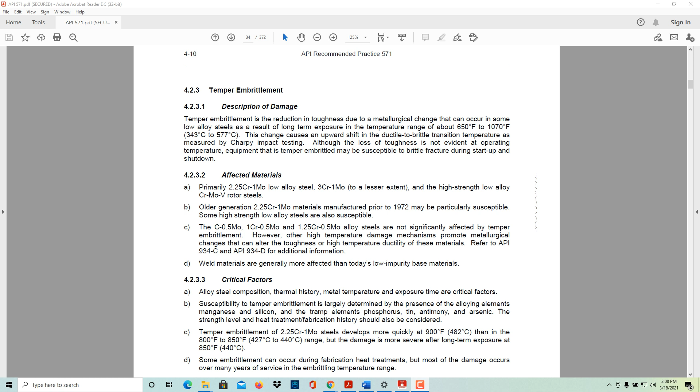Although the loss of toughness is not evident at operating temperatures, equipment that is temper embrittled may be susceptible to brittle fracture during startup and shutdown. Affected materials: primarily 2.25 Cr-1Mo low alloy steel, 3Cr-1Mo to a lesser extent, and the high strength low alloy Cr-Mo-V rotor steels. Older generation 2.25Cr-1Mo materials manufactured prior to 1972 may be particularly susceptible. Some high-strength low alloy steels are also susceptible.

The 1.25Cr-0.5Mo, 1Cr-0.5Mo, carbon-0.5Mo, and 1.25Cr-0.5Mo alloy steels are not significantly affected by temper embrittlement. However, other high temperature damage mechanisms promote metallurgical changes that can alter the toughness or high temperature ductility of these materials. Refer to API 934C and 934D for additional information. Weld materials are generally more affected than today's low impurity base metals.

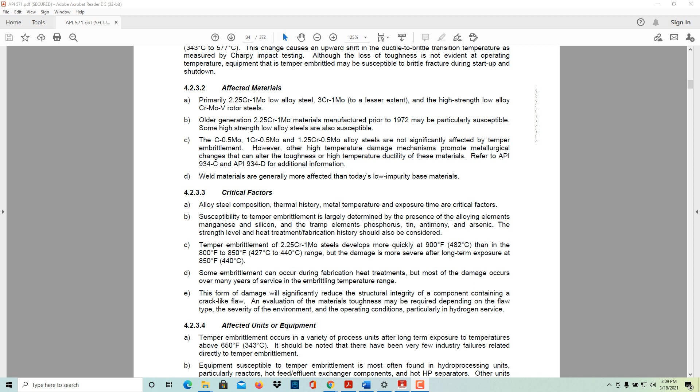Critical factors: alloy steel composition, thermal history, metal temperature, and exposure time are critical factors. Susceptibility to temper embrittlement is largely determined by the presence of the alloying elements manganese and silicon, and the tramp elements phosphorus, tin, antimony, and arsenic. The strength levels and heat treatment fabrication history should also be considered.

Temper embrittlement of 2.25Cr-1Mo steels develops more quickly at 900°F than in the 800 to 850°F range, but the damage is more severe after long-term exposure at 850°F. Some embrittlement can occur during fabrication heat treatments, but most of the damage occurs over many years of service in the embrittlement temperature range. This form of damage will significantly reduce the structural integrity of a component containing a crack-like flaw. An evaluation of the material's toughness may be required depending on the flaw type, the severity of the environment, and the operating conditions, particularly in hydrogen service.

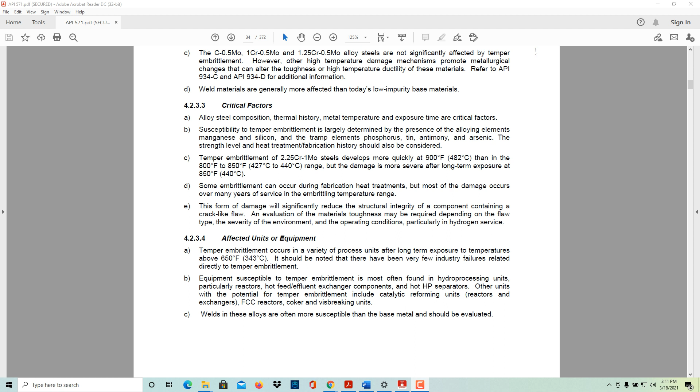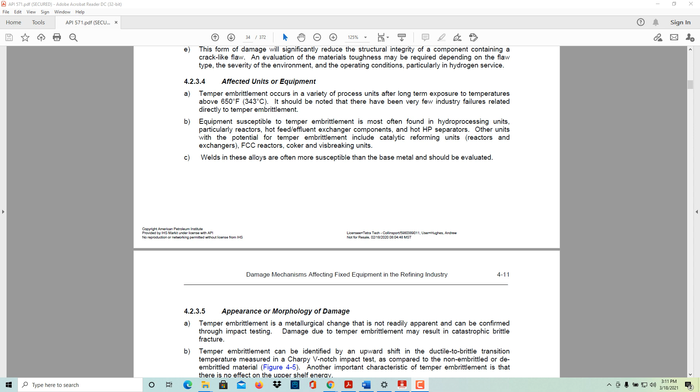Affected units or equipment. Temper embrittlement occurs in a variety of process units after long-term exposure to temperatures above 650°F. It should be noted that there have been very few industry failures related directly to temper embrittlement. Equipment susceptible to temper embrittlement is often found in hydroprocessing units, particularly reactors, hot feed effluent exchanger components, and hot HP separators. Other units with the potential for temper embrittlement include catalytic reforming units, reactors and exchangers, FCC reactors, coker, and visbreaking units. Welds in these alloys are often more susceptible than base metal and should be evaluated.

Morphology of damage and appearance. Temper embrittlement is a metallurgical change that is not readily apparent and can be confirmed through impact testing. Damage due to temper embrittlement can result in catastrophic brittle fracture. Temper embrittlement can be identified by the upward shift in the ductile to brittle transition temperature measured by the Charpy V-notch impact test as compared to the non-embrittled or de-embrittled materials. See Figure 4-5. Another important characteristic of temper embrittlement is that there is no effect on the upper shelf energy. SEM fractographs of severely temper embrittled materials show primarily intergranular cracking due to impurity segregation at grain boundaries.

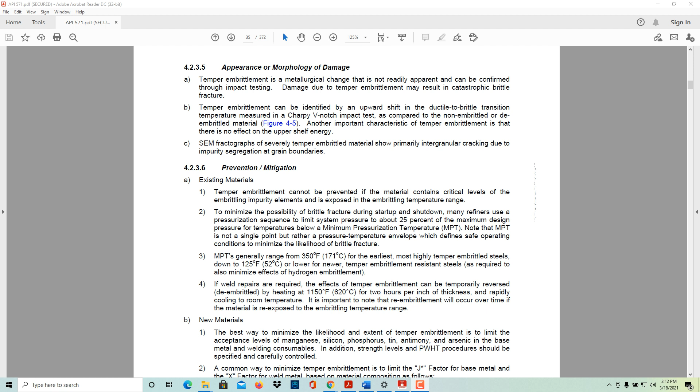Prevention and mitigation. Existing materials. Temper embrittlement cannot be prevented if the material contains critical levels of the embrittling impurity elements and is exposed to the embrittling temperature range. To minimize the possibility of brittle fracture during startup and shutdown, many refiners use a pressurization sequence to limit system pressure to about 25% of maximum design pressure for temperatures below a minimum pressurization temperature. Note that the MPT is not a single point, but rather a pressure-temperature envelope which defines safe operating conditions to minimize the likelihood of brittle fracture. MPTs generally range from 350°F for the earliest, most highly temper embrittled steels down to 125°F for newer temper embrittlement resistant steels, as required to also minimize effects of hydrogen embrittlement.

If weld repairs are required, the effects of temper embrittlement can temporarily be reversed, de-embrittled, by heating at 1150°F for 2 hours per inch of thickness and rapidly cooling to room temperature. It is important to note that re-embrittlement will occur over time if the material is re-exposed to the embrittling temperature range. New materials. The best way to minimize the likelihood and extent of temper embrittlement is to limit the acceptance levels of manganese, silicon, phosphorus, tin, antimony, and arsenic in the base metal and welding consumables.

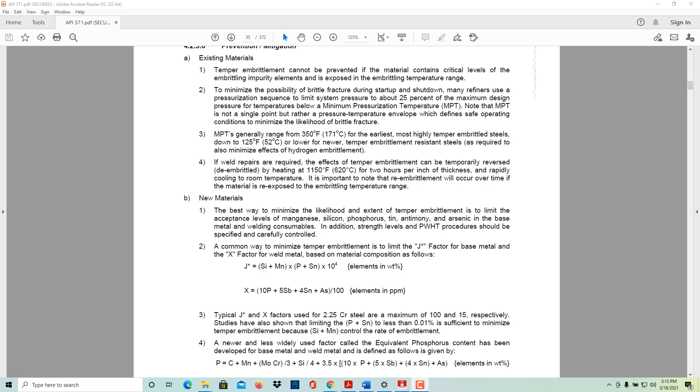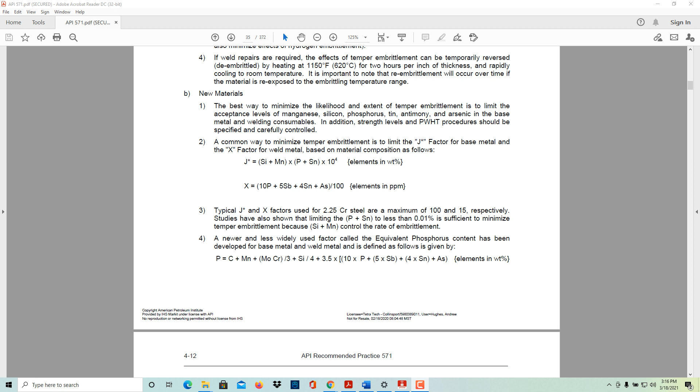A newer and less widely used factor called the equivalent phosphorus content has been developed for base metals and weld metals and is defined as follows: phosphorus equivalent equals carbon plus manganese plus the product of moly, chrome divided by 3, plus silicon divided by 4, plus 3.5 times (10 times phosphorus plus 5 times Sb plus 4 times Sn plus As), elements in weight percent.

So expert metallurgical advice should be solicited to determine acceptable compositions, toughness, and strength levels, as well as appropriate welding, fabrication, and heat treatment procedures for new alloy, low alloy, heavy wall equipment, and low alloy equipment operating in the temper embrittlement or creep range.

Inspection and monitoring. A common method of monitoring is to store blocks of original heats of the alloy steel material inside the reactor. Samples are periodically removed from these blocks for impact testing to establish the ductile brittle transition temperature. The test block should be strategically located near the top and bottom of the reactor to make sure that the test material is exposed to both inlet and outlet conditions. Process conditions should be monitored to ensure that a proper pressurization sequence is followed to help prevent brittle fracture due to temper embrittlement.

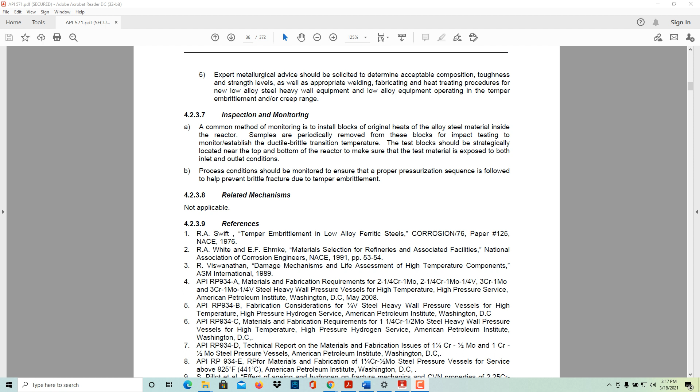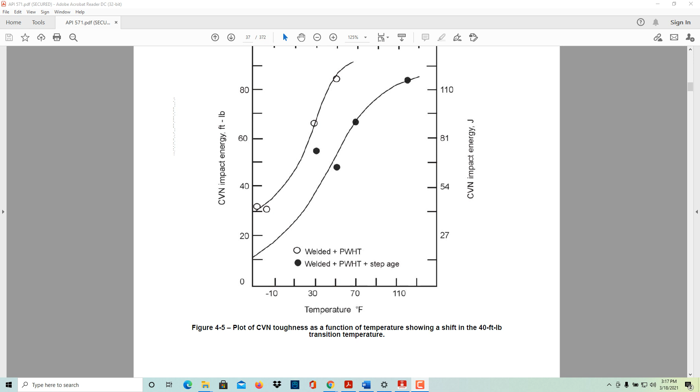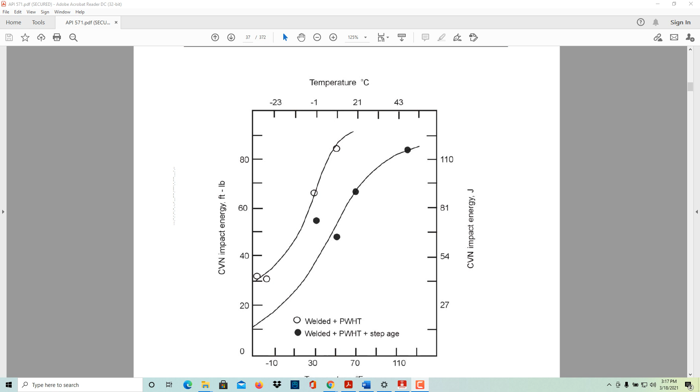Plot of CVN toughness as a function of temperature, showing a shift in the 40 foot-pound transition temperature. Temperature on this top axis, CVN impact energy in foot-pounds on this axis. Welded plus post-weld heat treatment. Welded plus post-weld heat treatment plus step age. And then CVN impact energy on this axis.

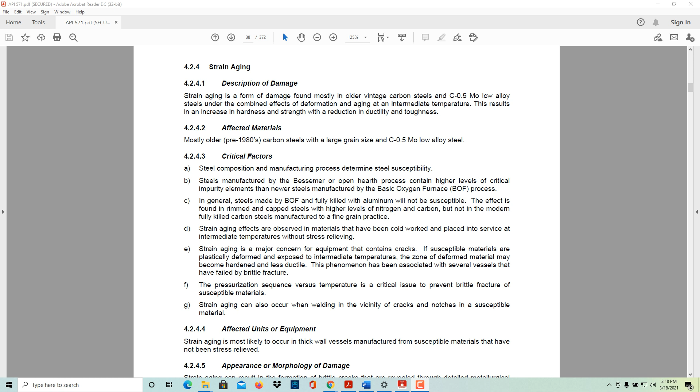4.2.4, strain aging. Strain aging is a form of damage mostly found in older vintage carbon steels and carbon half-moly steels, low alloy steels, under the combined effects of deformation and aging at an intermediate temperature. This results in an increase in hardness and strength with reduction in ductility and toughness. Affected materials: mostly older pre-1980 carbon steels with a large grain size and carbon half-moly low alloy steels.

Critical factors. Steel composition and manufacturing process determines steel susceptibility. Steel manufactured by the Bessemer or open hearth process contain higher levels of critical impurity elements than newer steel manufactured by the basic oxygen furnace process. In general, steels made by BOF and fully killed with aluminum are not susceptible. This effect is found in rimmed and capped steels with higher levels of nitrogen and carbon, but not in the modern fully killed carbon steels manufactured to a fine grain practice.

Strain aging effects are observed in materials that have been cold worked and placed into service at intermediate temperatures without stress relieving. Strain aging is a major concern for equipment that contains cracks. If susceptible materials are plastically deformed and exposed to intermediate temperatures, the zones of deformed materials may become hardened and less ductile. The phenomenon has been associated with several vessels that have failed by brittle fracture. The pressurization sequence versus temperature is a critical issue to prevent brittle fracture of susceptible materials. Strain aging can also occur when welding in the vicinity of cracks and notches in a susceptible material.

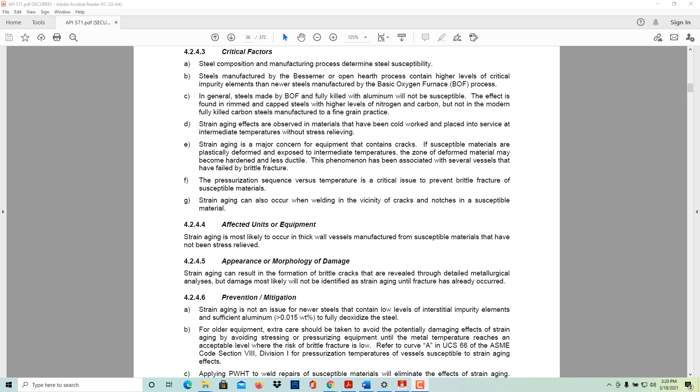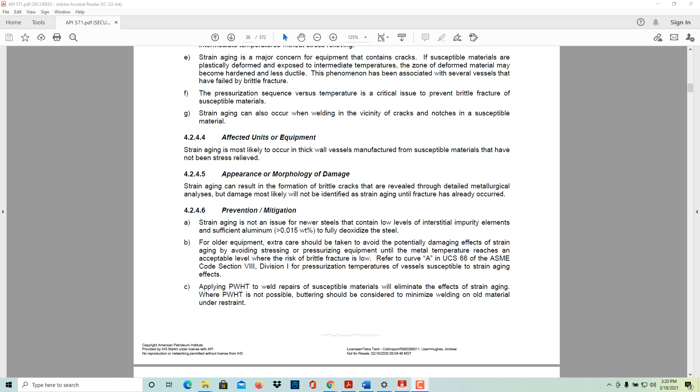Strain aging is most likely to occur in thick wall vessels manufactured from susceptible materials that have not been stress relieved. Appearance and morphology of damage. Strain aging can result in the formation of brittle cracks that are revealed through detailed metallurgical analysis, but damage most likely will not be identified as strain aging until fracture has already occurred.

Prevention and mitigation. Strain aging is not an issue for newer steels that contain low levels of interstitial impurity elements and sufficient aluminum, 0.015% by weight or greater, to fully deoxidize the steel.

For older equipment, extra care should be taken to avoid the potentially damaging effects of strain aging by avoiding stressing or pressurizing equipment until the temperature reaches an acceptable level where the risk of brittle fracture is low. Refer to curve A in UCS-66 of the ASME Code Section VIII, Division 1 for pressurization temperatures of vessels susceptible to strain aging effects.

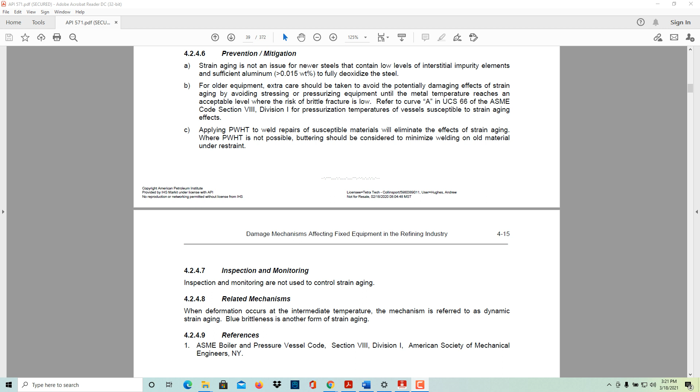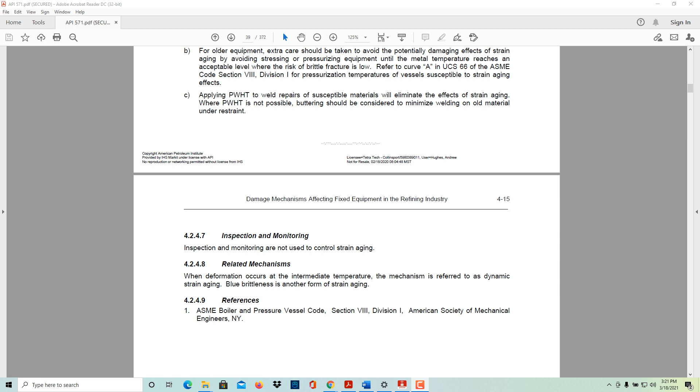Applying post-weld heat treatment to weld repairs of susceptible material will eliminate the effects of strain aging. Where post-weld heat treatment is not possible, buttering should be considered to minimize welding on old material under restraint. Inspection and monitoring: inspection and monitoring are not used to control strain aging. Related mechanisms: when straining occurs at an intermediate temperature, the mechanism is referred to as dynamic strain aging. Blue brittleness is another form of strain aging.

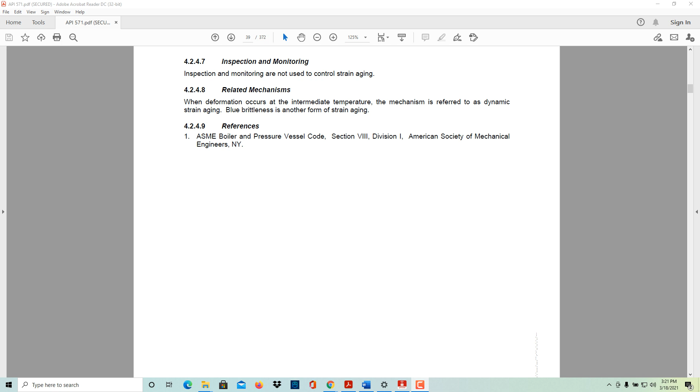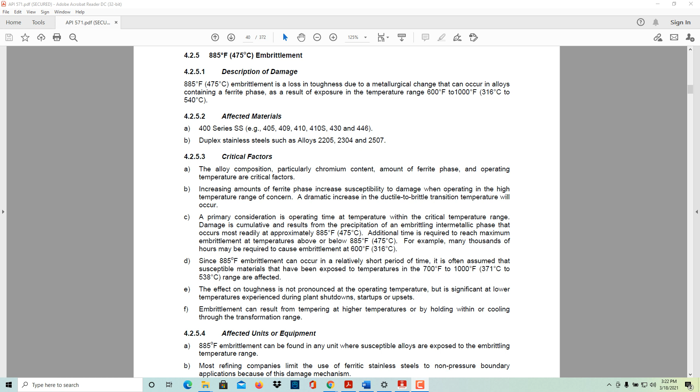885 embrittlement. Description: damage. 885 embrittlement is a loss of toughness due to the metallurgical changes that occur in alloys containing a ferrite phase as a result of exposure to temperatures in the range of 600 to 1000°F. 400 series SS: 405, 409, 410, 410S, 430, and 446 are affected materials. Duplex stainless steels such as alloys 2205, 2304, and 2507 are also affected. Critical factors: the alloy composition, particularly chromium content, amount of ferrite phase, and operating temperatures are critical factors.

Increasing amounts of ferrite phase increases susceptibility to damage when operating in the high temperature range of concern. A dramatic increase in the ductile to brittle transition temperature will occur. A primary consideration is operating within the critical temperature range. Damage is cumulative and results from the precipitation of an embrittling intermetallic phase that occurs most rapidly at approximately 885°F. Additional time is required to reach maximum embrittlement at temperatures above or below 885°F. For example, many thousands of hours may be required to cause embrittlement at 600°F.

Since 885 embrittlement can occur in relatively short periods of time, it is often assumed that susceptible materials exposed to temperatures in the 700 to 1000°F range are affected. The effect on toughness is not pronounced at the operating temperature, but significant at lower temperatures experienced during plant shutdowns, startups, or upsets. Embrittlement can result from tempering at higher temperatures or by holding within or cooling through the transformation range.

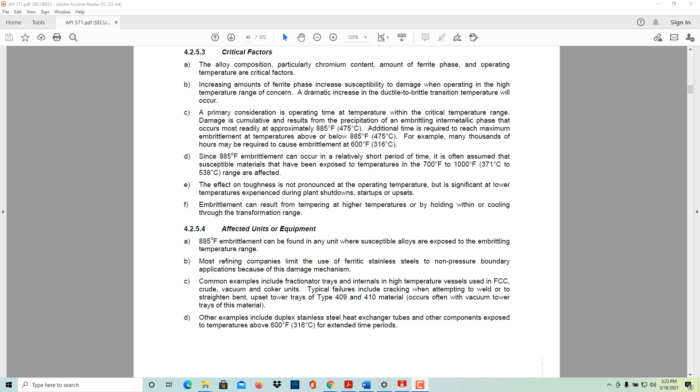Affected units and equipment. 885 embrittlement can be found in any unit where susceptible alloys are exposed to the embrittlement temperature range. Most refining companies limit the use of ferritic stainless steel to non-pressure boundary applications because of this damage mechanism. Common examples include fractionator trays and internals in high temperature vessels used in FCC, crude, vacuum, and coker units. Typical failures include cracking when attempting to weld or to straighten bent, upset tower trays of type 409 and 410 materials, which occur often in the vacuum tower trays of this material. Other examples include duplex stainless steels, heat exchanger tubes, or other components exposed to temperatures above 600°F for extended periods of time.

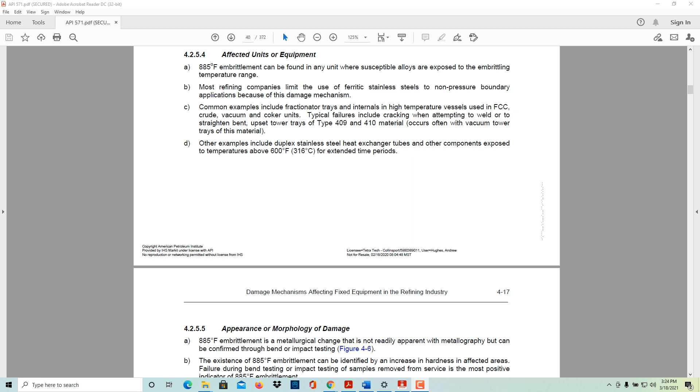Morphology or appearance. 885 embrittlement is a metallurgical change that is not readily apparent with metallography, but can be confirmed through bend or impact testing. The existence of 885 embrittlement can be identified by an increase in hardness in affected areas. Failure during bending or impact testing of samples removed from service is the most positive indicator of 885 embrittlement.

Prevention and mitigation. The best way to prevent 885 embrittlement is to use low ferrite or non-ferrite alloys, or to avoid exposing susceptible material to the embrittlement range. It is possible to minimize the effects of embrittlement through modifications in the chemical composition of the alloys. However, resistant materials may not always be readily available in the most commercial forms. 885 embrittlement is reversible by heat treatment to dissolve precipitates, followed by rapid cooling. The de-embrittlement heat treatment temperature is typically 1100°F or higher, and may not be practical for many equipment items. If the de-embrittled component is exposed to the same service conditions, it will re-embrittle faster than it did initially.

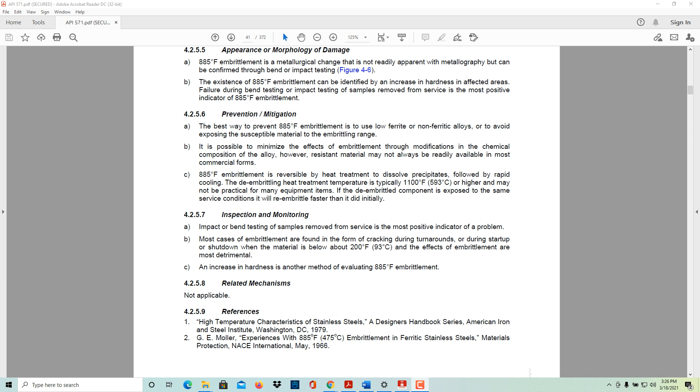Inspection and monitoring. Impact or bend tests of samples removed from service is the most positive indicator of a problem. Most cases of embrittlement are found in the form of cracking during turnarounds or during startup or shutdown, when the material is below 200°F and the effects of embrittlement are most detrimental. An increase in hardness is another method of detecting 885 embrittlement. Related mechanisms.